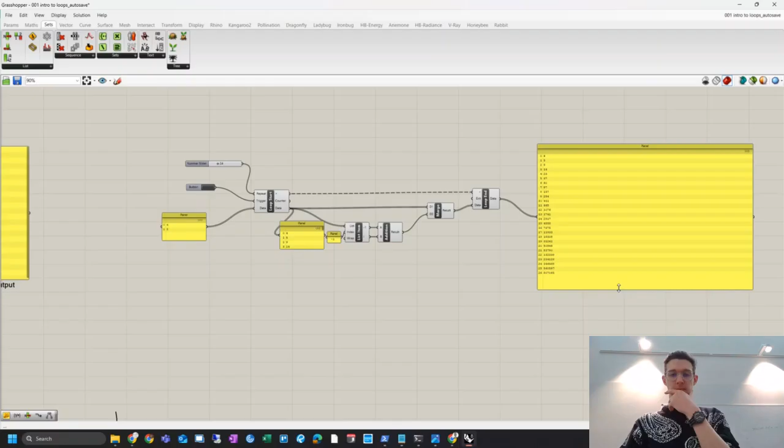That's all right, no, we're starting again. We've been really helpful, just for me to understand, because you're all part of one of there's another module that you're working in groups on. Just be really helpful to know which groups are being represented here, because then as we come to your own personal brief, I could think, okay, well in week 4, week 6, week 8, maybe we could do this instead. So we just start from wherever. Let me know who you are and what group you're part of and what your brief is at the moment. Anyone want to go first? Otherwise we'll just start at the end and move on. But yeah, go for it.

Part of? Gothic timber, yeah, got it. I can't promise, but if you say your name I'll try and remember it. Kine. Sorry, I can't hear for some reason, it's all these wonderfully designed acoustic baffles. Kai, brilliant, Gothic timber, Kai, excellent. Are you enjoying yourself? Yeah. Good, Gothic timber is pretty cool, right? Yeah, bending stuff, making stuff out of wood. Yeah, cool.

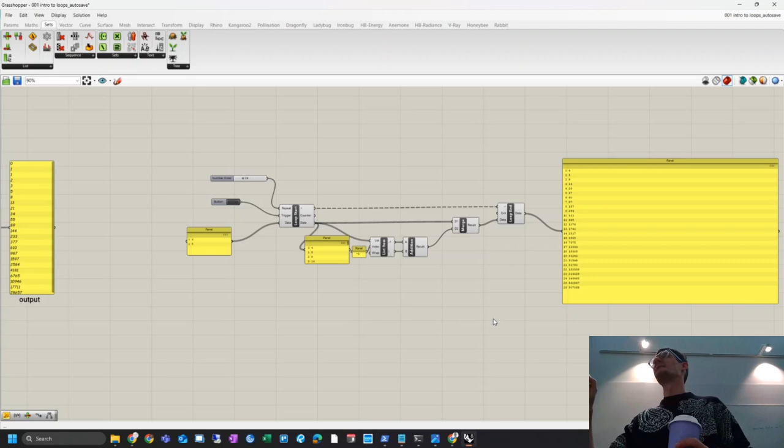I'm gonna have to try and get this right. Sampiotta, I'm really sorry, this is very embarrassing isn't it. I will do my best. Yeah, okay cool. Yes, yeah cool, I think I remember seeing most of your presentations so I'm trying to put everything together in my mind. Oh really, oh okay, you switched, I didn't realize you were allowed to do that. It was their special dispensation. Okay, all right, yeah cool.

Oh, the cob, the monster. Cob monster, yeah cool. My name is Fatma. I was in the urban mining group, but now I'm in the cob group. Oh, there's a lot of, is this like musical chairs? There's a lot of moving around. Thanks Fatima. Yeah, I'm Sim, I'm also in the cob group. Oh okay, oh this is the little cob corner. Yeah, cob community.

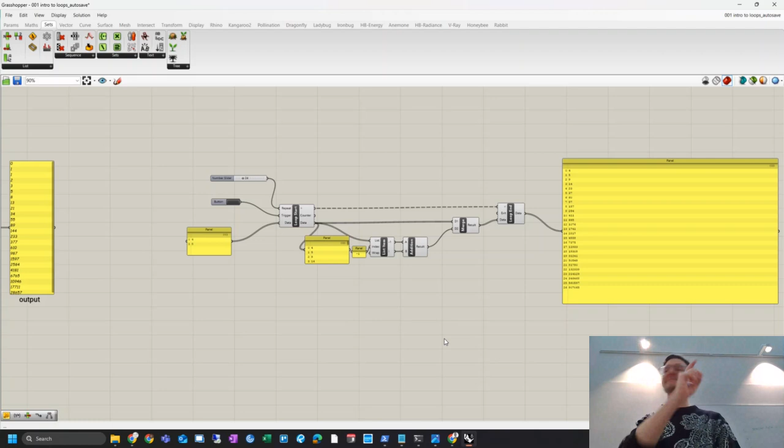Yeah, should we go over to you? I'm Ping and I'm in digital timber. Digital, the Gothic timber, yeah. With Kai. Yeah, with Kai. Kai and Ping, yeah, excellent. I'm Chan from Urban Mining Group. Urban mining, same with the stone? No, not stone. Oh are you doing, was this the group with the ceiling tiles, the roof tiles? Yeah, okay got you. My name is Agman, I'm in the stone group. Cool, Agman, Ayman, okay yeah cool.

I'm second year in GS2, I'm now in DCM. Oh that's cool, that's good, we're all here to learn. You and me both. Well, everyone knows you. Yeah, I'm Ali, I'm also an ex-DCA student. Cool, I'm second year now, and here to assist you. Yeah, oh so far none of this would happen without you, so well done. I'm Andrea. Andrea? And I'm with the stone. Yeah, with that. Sam, great.

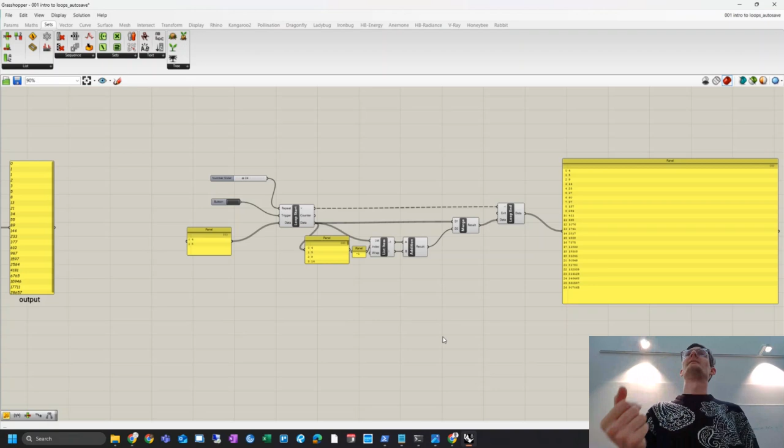I'm Shida, I'm in urban mining. Cool. I'm Hunter, I'm also from the urban mining group. And the urban mining group is the stone one, and the retrofit one is the roof tiles, is that right, or are they the same? Well, it's the same for this semester, but for the previous semester it was kind of different, the stone group was working on... Okay, oh well this is fun.

And what I'm glad about is that there's lots of different groups represented, so hopefully there's something you'll learn here that you'll take back to any group that you're in. Okay great. I can't promise to remember your names, but I'll try my best.

What I want to do is very quickly look at... by the way, save your work.

The thing that everyone talks about with Fibonacci is that people say things like, oh, Fibonacci is in nature. And you kind of go, yeah okay great. But I don't walk out into the world and see these numbers like 1, 1, 2, 3, 5, 8, 13. I don't just see these numbers floating around. So what do people mean when they say that Fibonacci is in nature? Usually what you'll see are these kinds of images where you've got a spiral, and you might well be thinking, okay, I see that there's a spiral and I see that there's this series of numbers, but how do they have any relation to one another? So this is yet another one of these really good examples where a computer just talks in numbers, but we want to talk about geometry and shape and curves and 3D, right? And those numbers aren't very useful to us until we've done something with them.

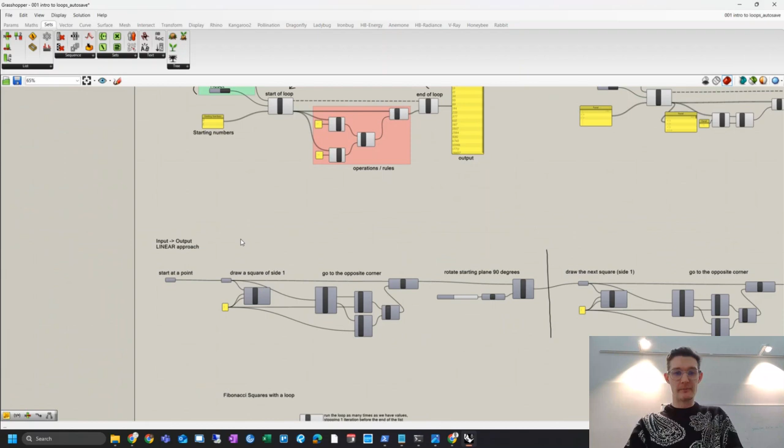But would it have been simple if I wasn't explaining it? Good question. But the way we're going to do this is exactly the same as we did here. We started with a linear approach. We didn't get into the loop until we understood what we were trying to do, and then we built the function that would do it.

So what we're going to do is start at a point. I might draw this on the board again. We're going to start at a point, and I'm going to draw a square of side 1. So we go 1, 1, 1, 1. So there's a square, and it starts at this point.

Then what we're going to do is go to the opposite corner of the square, which in this case is here, and draw another square. But if I just draw the square in the same way as I drew it before, it's going to go like this, right? Not particularly helpful.

What I want to do, to make a mess on the board, is rotate the plane in which I'm going to draw that square by 90 degrees. So instead of drawing a square off and up and to the right, it's almost like I take my piece of paper and rotate it 90 degrees and draw the same square—instead of going up and to the right, it goes up and to the left.

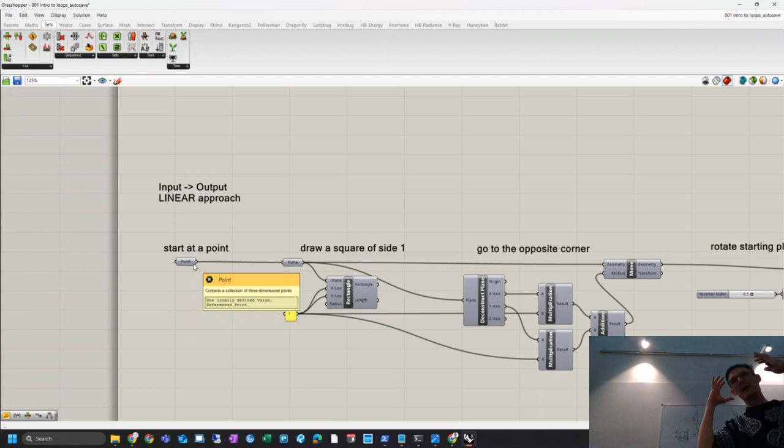Everything I've just talked about kind of makes sense in your mind when you're holding a pen and using a piece of paper. Try drawing a little sketch of it, use squared paper if you've got any, do a little doodle, and just try to figure out exactly what the processes are. It makes sense when you're holding a piece of paper and a pen, but a computer doesn't have a pen and a piece of paper—a computer just has numbers. So now we have to figure out what we're telling the computer to do.

And the first step of that is that we're going to make it happen in Grasshopper in a linear way. So we're just going to do 1 or 2 iterations, and then we're going to make that loop happen. Do you want to take 30 seconds and see if you can understand what the process is that I'm doing?

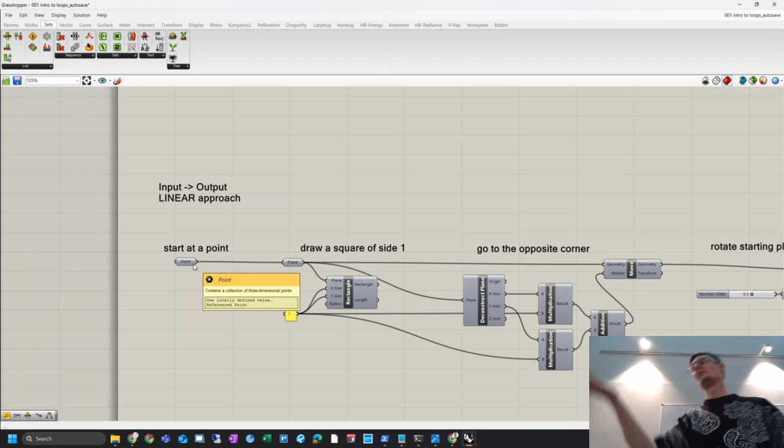The only thing that confuses me is when you say like side 2, for example, what like... Oh, a square of side 2 just means a square which has a length of 2 and 2. And a square of side 5 would have 5 along there and 5 along there. Every single one of them is a square, so it makes it much easier because it's not a rectangle where one side is different to the other.

Are you sort of getting what we're trying to achieve here? There's a cool little... this is your hand. And so if you measure the distances between your knuckles, what you'll notice is that this little guy here and this little guy here are kind of the same length. And that guy there is kind of roughly twice those two lengths, those two lengths added together. And then this distance here is that plus that. Roughly. I mean, nature is a little bit wibbly sometimes.

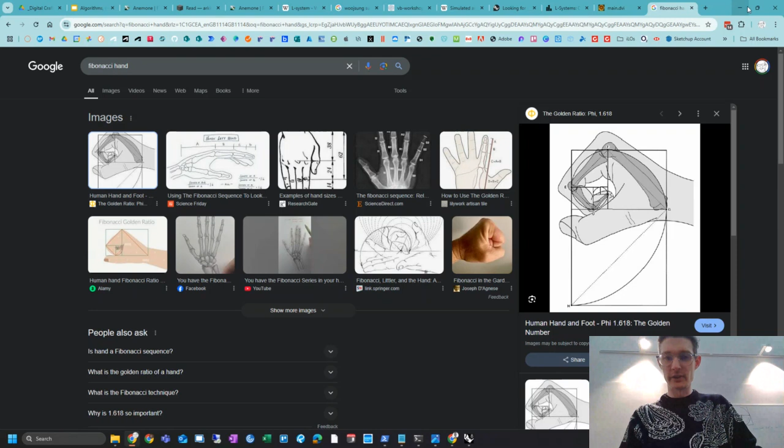Cool. We don't need to spend huge amounts of time, but do you kind of get what we're trying to do here? Yeah, you can kind of visualize it now. Pen and paper, always the first thing I reach for. So what we're going to do is we are going to go into my sort of split screen approach here. And we'll start at this point over here. In fact, I'll go into my top view. I'm going to start at this point.

And the cool thing about Grasshopper is that you can turn a point into a plane. Have you tried to do this? Have you ever done this before? You literally wire a point into a plane, and then that plane will then be the XY plane, like the ground plane, but centered around that point.

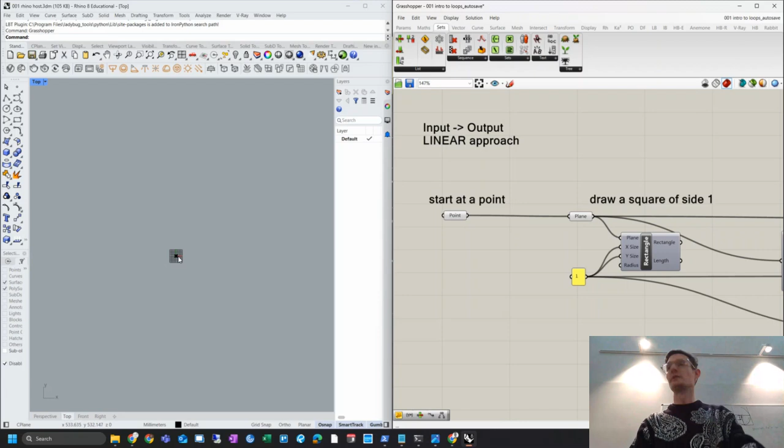Can we also choose to put the XY plane instead of just plane? Or does that matter? If you put the XY plane, it'll be centered at 0. But what I'm doing is I want to start at a particular point on my Rhino. But I mean, it doesn't make any difference. You can do it any way you like, as long as we start with a plane.

And the reason we're going to start with a plane is because let's look at this plane here. It's got a green arrow and a red arrow. It's got an X direction and a Y direction. And when we create a rectangle in a plane, let's just look at this guy. We create a rectangle in that plane. It's going to be going in that direction and this direction, the X and the Y direction of the plane.

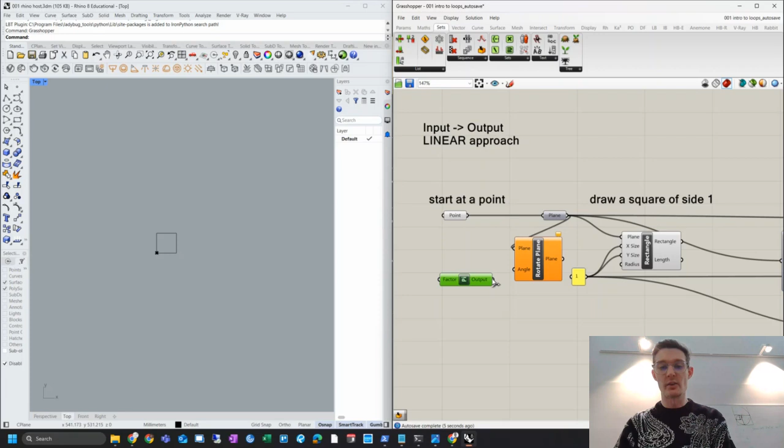Now, if I take this plane, let's just play with this for a second, and I'm going to type rotate. Actually, I can do rotate plane. Yeah, here we go. Rotate plane. I'm going to feed this plane in here, and it's going to ask for an angle, and the angle is in radians, so I need to wire in a pi, and I need to wire in a number for the factor of pi. And this plane here, as I change the rotation, I can rotate this plane around. You see? See what we're doing?

Nice and simple. But if I feed that plane into a rectangle and rotate the plane, I'm just rotating the rectangle around that point. Cool. I don't need to do that. I'm starting with a plane that's just as it is. And then the next step in the sequence of rules that I've just defined here is once I've drawn that rectangle in a plane, I'm going to go to the opposite corner.

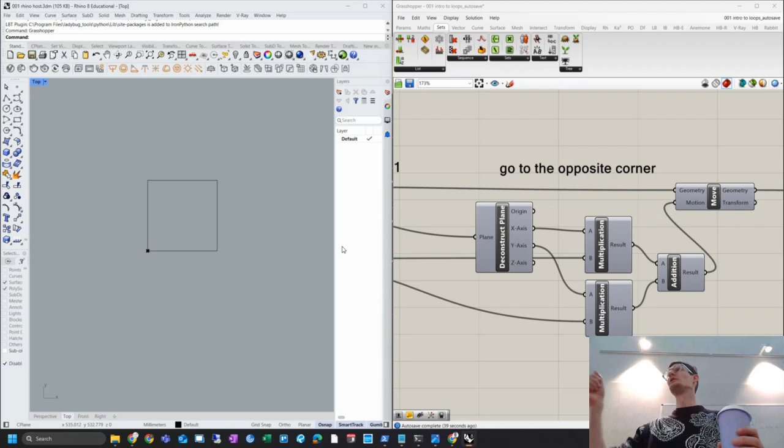But then if I take this point here and I move 1 unit along the x direction of the plane and 1 unit up the y direction of the plane, then I've reached the opposite corner of my rectangle, right? So I've taken this plane and I've deconstructed it. And a deconstruction of the plane gives me the origin, the x-axis vector, and the y-axis vector.

I'm going to feed those vectors into 2 things here. The first is a multiplication, because that vector is just a direction, and it's a unit vector. It's 1 unit in that direction. If I rotate the plane, it's still going to be that length. That vector isn't going to be the length that I want it to be.

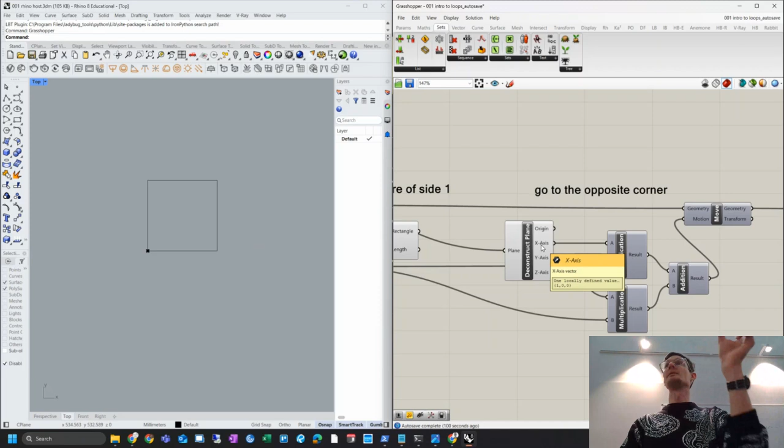So what I have to do is I multiply the vector by the size of the square that I want. So imagine this is a 5-size square. It goes 5 units across and 5 units up. I need to take my x-axis, which is currently 1, 0, 0 in the x direction. I need to multiply it by 5 to get to this corner.

And then I need to go up, and I need to multiply that by 5 to get to the top corner. So I'm going to multiply it by this guy here, the size of the square that I'm drawing. And then I'm going to do the same thing to the y-axis. I'm going to add those 2 vectors together. So we're effectively going 1 along here, 1 along there. The resulting vector is the addition of those 2 vectors, which takes me from this corner to this corner.

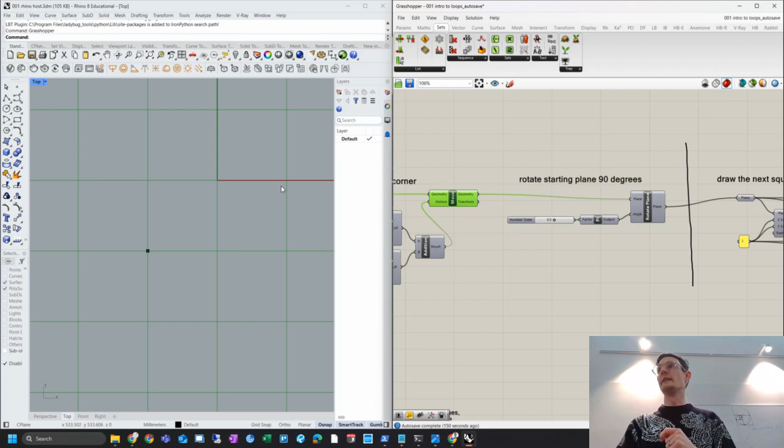And now if I turn that on, it's moved the plane from here to here. So we're moving a plane in a particular 2 sets of vector directions. Then I'm going to rotate that plane. Remember, by the way, green is up, red is across. Now I'm going to rotate that plane 90 degrees, and now green is that way and red is up. So I've rotated the plane 90 degrees.

Once I've rotated the plane 90 degrees, well, we draw the next square. And the next square happens to have a Fibonacci side of 1, still 1, because 1, 1, then 2, then 3. And we do exactly the same thing again. And I've drawn this little line in here that kind of separates it out.

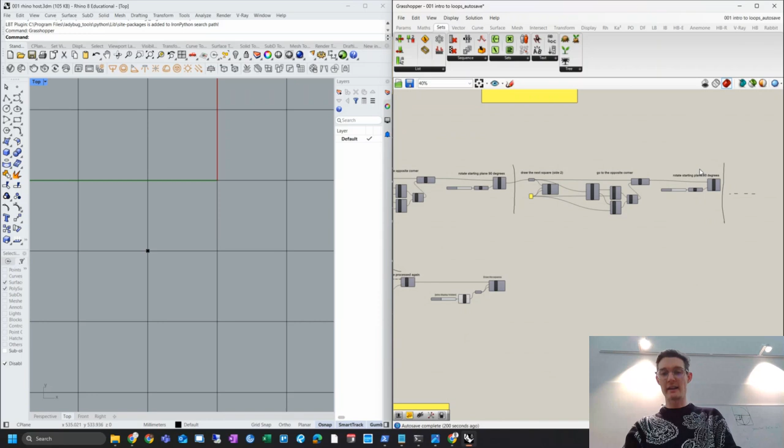Are you following along with me? Are you creating this definition as you go? Cool. Then we draw the next square. And then we go the opposite corner, and then we rotate the plane. And we could keep doing that for a long time, but it's going to get really, really boring.

So what I'm going to do is, now that we're happy with that approach, the linear approach, we're just doing 2 or 3 iterations. Now let's think about how we're going to loop this. So the first thing we're going to do is we're going to bring in the values from the previous loop output. And I'll make this on the right-hand side so you can follow along, and we'll do it together, okay?

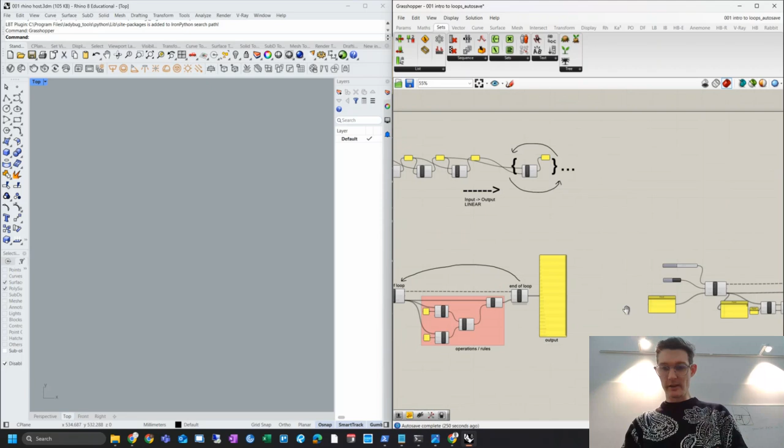So the first thing I need is this guy here. These are all my Fibonacci numbers. They look wrong. They're wrong because I started 1, 1. There we go. Started 0, 1. And there we go. They should be the same. Yes, they are. Great. So I've got my Fibonacci numbers here that I've created using a loop. I'm going to take the output of that. I'm going to use that in our next loop.

And the way we're going to do that is I'm going to come over here and I'm going to start with a panel. And I'm going to connect this panel to the output that we got from the previous loop. And then, because I don't like these lines being all over my definition, I'm going to right click and do wire display hidden.

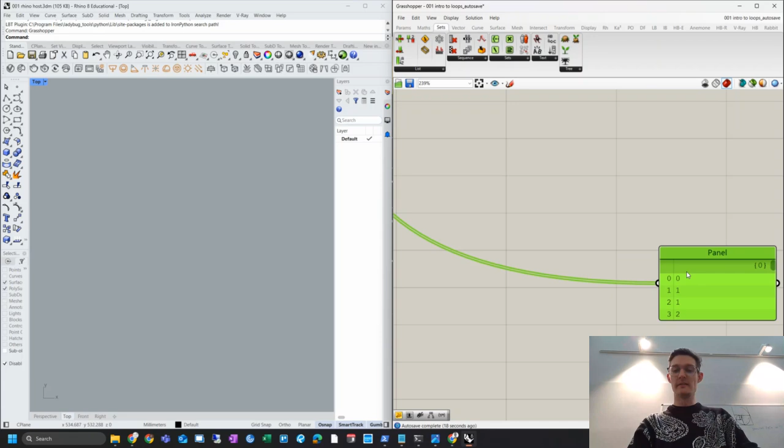And it turns it into like a little Wi-Fi signal. And if I click on the element, it will bring the line back so I can see what it's connected to, but it doesn't disrupt my definition. So now what I've got is my list of Fibonacci numbers. Here we are. And what's the next thing we're going to do?

Well, we're going to start at a point, and we need a starting place for our loop. So here we are. I'm going to set one point, and I'm going to select it in Rhino, or you can start at the origin, completely up to you. If you want to start at the origin, you can. We start at a point, and then I'm going to send that to a plane. There it is. There's my plane. I'm going to turn the display of that plane off just because it's a bit annoying.

And then we need a loop start. I'm going to send that plane data in, feeding in a plane. And we need to know, well, how many times are we going to repeat it? I don't know, let's do 12. And we need a little button to reset the loop. There we go. And then we need a loop end to connect up. And this isn't receiving any data yet. We haven't passed any data in.

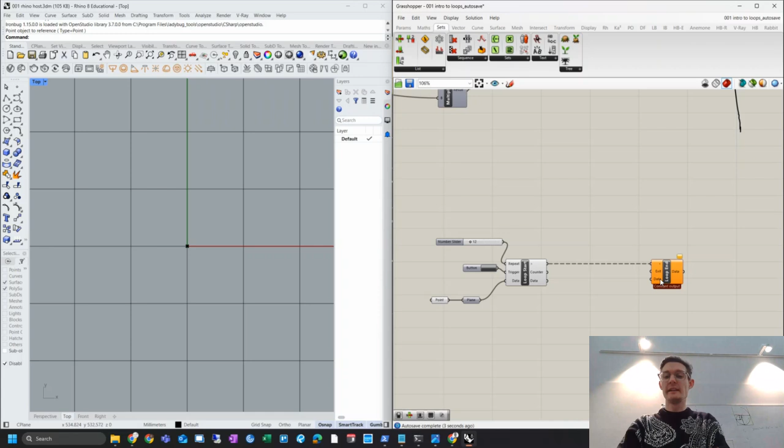And then what are we going to do? Well, one of the things that we did before was we had a list of all of these numbers and we added to that list every single time. There is a nice way that Anemone gives you the ability to record the data as you go around the list. So it means you don't have to maintain that list yourself. It's going to do it for you.

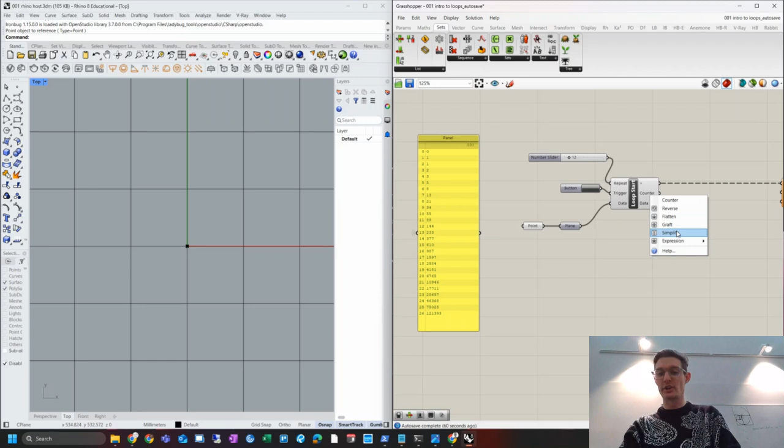And what we're going to do is we're going to start using the counter information, exactly like you asked. Well, here's the thing, right? You've got a list of all the Fibonacci numbers here, and they've got indices, and there are 25 there. So the first time round this loop, I want to read the first number, which in this case is actually 0. But let's ignore the 0, and we'll put an expression on that counter, and we'll say x plus 1. And now that's going to read the first index, not the 0th index. So that's going to start us off with a number 1.

That counter is going to allow us to make a list item node that takes the index and then this list. And now look, the item should be saying 1 because that's the item that's at index 1. Now, that number on this iteration of the loop is telling me how big my rectangle should be. And I have a plane to draw it in.

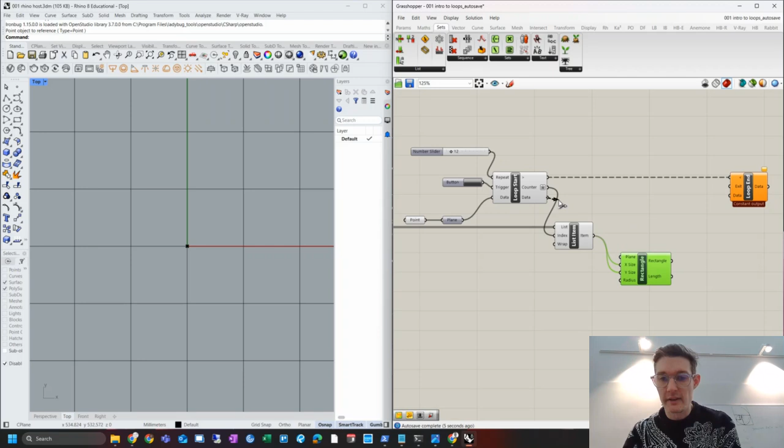So all I need to do is type rectangle, and the x size and the y size is going to be given to us. And the plane is the plane. So as I click on that, this has gone green. It's drawn me a rectangle that's of size 1 in the right plane.

Now, actually, I'm not going to draw the rectangle just yet. What I'm going to do is use the loop to do all of the plane rotation and movement functions. And then I'm going to let Anemone do something really helpful, which is the end of the loop. If you right click on it and zoom in, it says constant output. That means that it's outputting the last thing in the loop. It's going to loop 12 times and then give you the last thing.

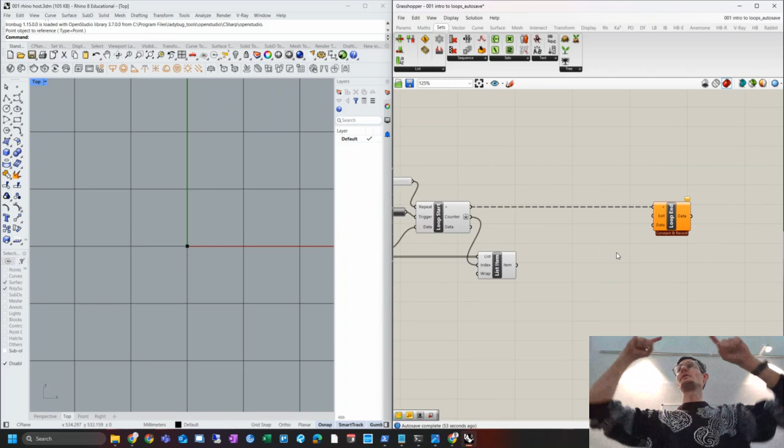But if you right click on it and do record data, now it says constant and record. Well, constant and record, what that's going to do is if it loops 12 times, every single one of these outputs is going to be stored in a list. And then it's going to give me the list of all the things that it's produced.

So what I'm going to do is feed in a plane, and I'm going to do a series of loops which move the plane, rotate it, feed it back in. Move it, rotate it, feed it back in. Move it, rotate it, feed it back in. And then I'm going to end up with a list of planes that are in the right places and in the right rotations. And then I can use that list of planes to create a list of rectangles that go in exactly the right place, of the right size. Yeah, cool. So here we go.

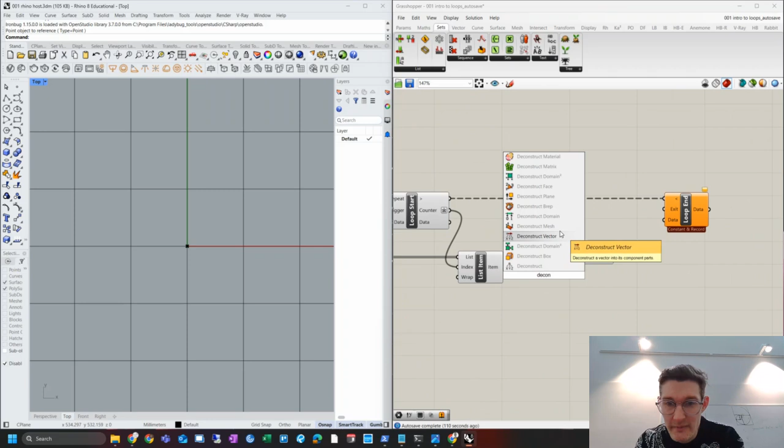I take my list item, which is in this case 1, and I'm going to move the plane. I do it exactly the same way as I did before. We're going to deconstruct it, deconstruct plane. We're going to move it 1 in the x-axis direction and 1 in the y-axis direction. So I need a couple of multiplications here. 1, 2, x-axis, y-axis, times 1, times 1.

Then I need to add those vectors together to make one single movement vector. And then I'm going to take my plane that's come in and I've moved it here. So I've used a motion and a move tool here. Are you following along so far? Making some sense? However, I'm not quite done yet.

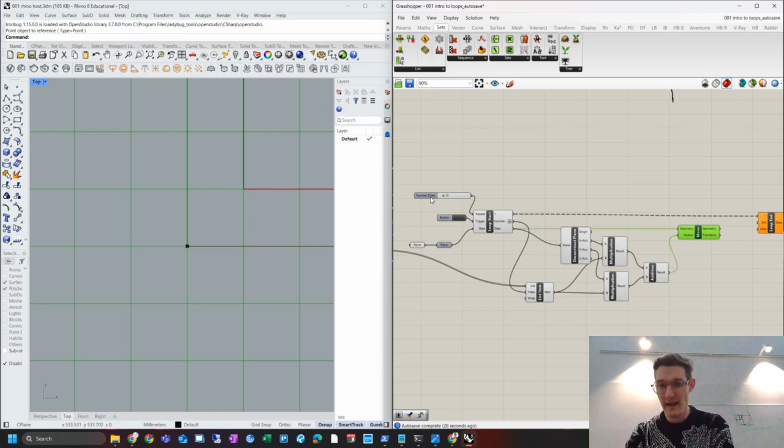I've got a plane. I've moved it to the opposite corner. In fact, look, the green and the red lines have moved to the opposite corner of the square. So I'm on to a winner. But then the next thing I need to do is rotate that plane 90 degrees to the left. So now what I need to do is rotate plane.

And if I was a little bit lazy, look, I've already got a definition for rotating a starting plane. And all it is is a number slider 0.5 times pi feeding into a rotate plane with a plane input and an angle input. So what I can do is just copy this from my linear definition.

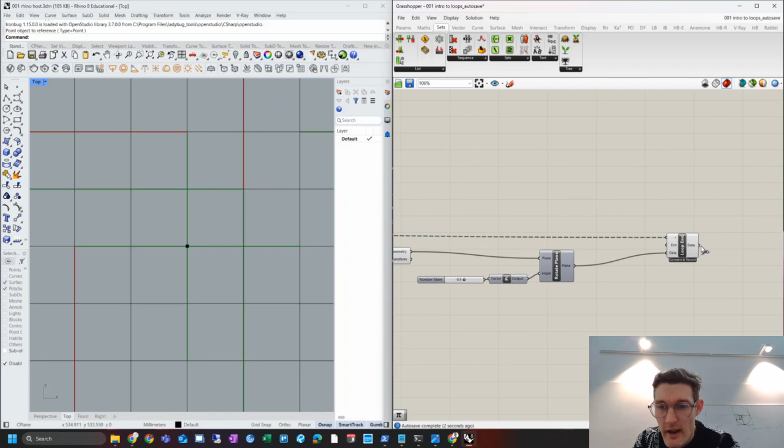Here we go. I'll get rid of that. And instead of being attached to this, I'm going to attach it here. So then this rotates the plane. And then, now I'm done, I feed that back into the data. And then I want to have a look at what I've ended up with.

What I've ended up with should be 12 planes. There you go. You can see there's one here, there's one here, there's one here, here, here, here, here. And they're already starting to look a little bit like if you just join them all up, they'd be like a spiral.

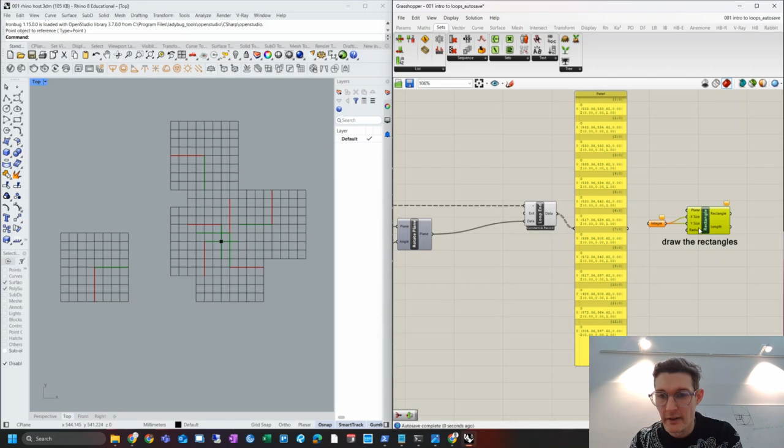Now those planes are all very well and good, but now I want to draw the rectangles in place. So I'm going to put a little scribble to remind me what I'm doing here, which is draw the rectangles. And now what I want to do is I want to make one of these, and I need an integer value for each one of the rectangles, and I'm going to feed in the planes.

However, you'll notice that these planes are part of a tree. The line is dashed. So the data structure of this is being added to by the loop component. All I need is just a simple list. So all I need to do is flatten that down. And now I've got my list of planes, just a flat list. I'm going to feed that in here.

And what I need, ideally, is the first 12 integers to match up with the first 12 planes that I've created using the loop. And that will draw those rectangles in the right place. So all I need to do is bring this list over here, all the way across, and feed that into my integer value here.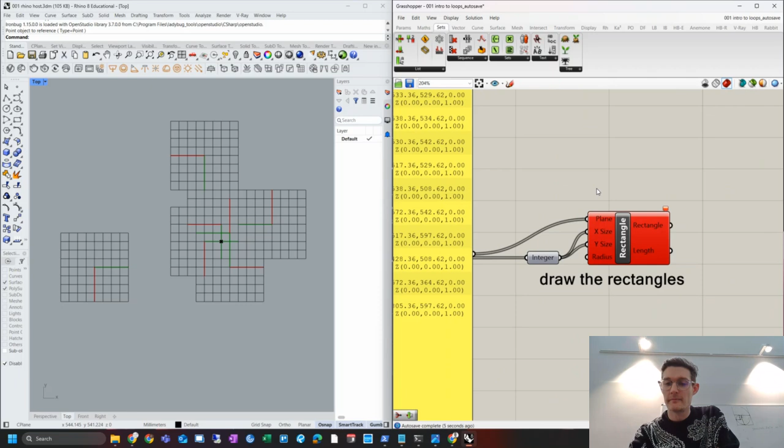Why do you flatten the data? Oh, flatten the data. Okay. So imagine you're the loop component and you're thinking, right, okay, so I've gone around once and I've got some bit of data that the user has done something with. Then I've gone around again and I've got some other bit of data. Then I've gone around again and I've got some other bit of data. It doesn't know what you want to do with that data. So what it does is it puts them all in different branches of a tree, and then it allows you to filter through that tree and do what you want with it.

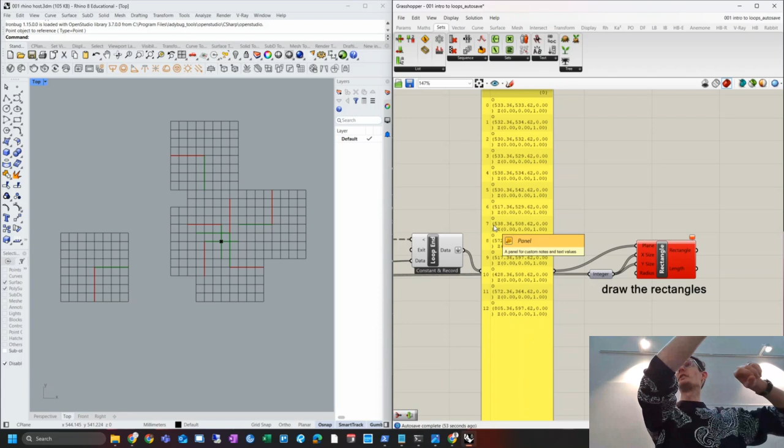So effectively what you're doing is you're saying, this is the data from iteration 1. This is the data from iteration 2. This is the data from iteration 3. And they're all branches of a tree. But if all you want is just the result of iteration 1, 2, 3, 4, 5 in a list, all you do is you take that tree and you flatten it into a list. And that's all I want at this point.

Now, oh yeah, there we go. Because I fed it through a panel, it turned it into text, which wasn't very helpful. So I've connected that up now. And here are my rectangles. And almost certainly something's gone wrong. Ah, yes. It's a whole load of mess. So now we have to figure out, well, why is it going wrong?

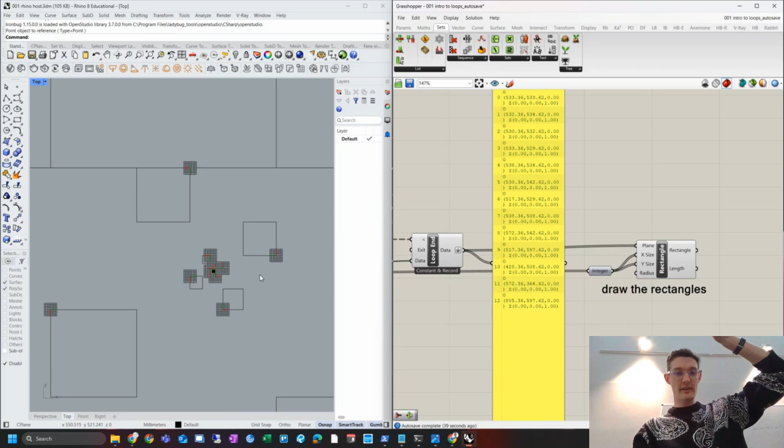Well, a couple of things, right? The first rectangle that I assumed would be the case would be one that started with 1. But I'm feeding in a list of integers that starts at 0. So it's all offset. So it's drawing these squares, but they're the wrong sizes. And they're on the wrong planes. So all I need to do is I need to take this list and I'm going to shift that list. Here we go. I'm going to shift it, not 1 along. Oh yeah, there we go. That should work.

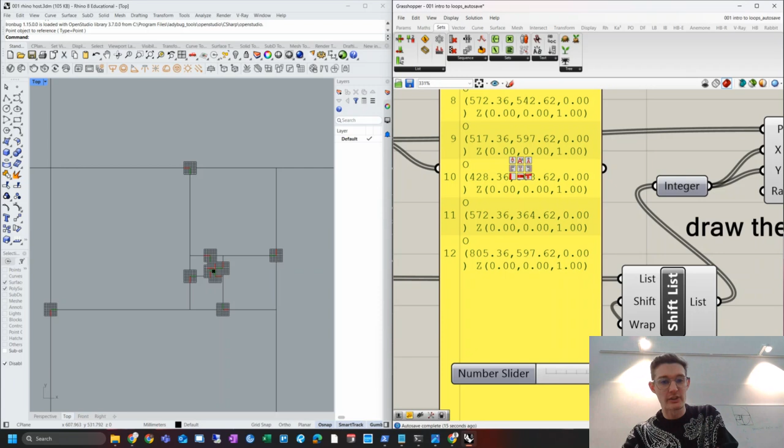I'm just going to give myself a little number slider to figure out exactly where we need to shift it. There we go. If we shift it 2 along, the reason for that is that the first iteration doesn't actually get counted in the list. So all I've done here is I've shifted it until it just suddenly flips into place. And I'm going to turn off this. And here we go. So here's our starting point. 2 squares of side 1, side 2, side 3, side 5, 8. And we can keep going.

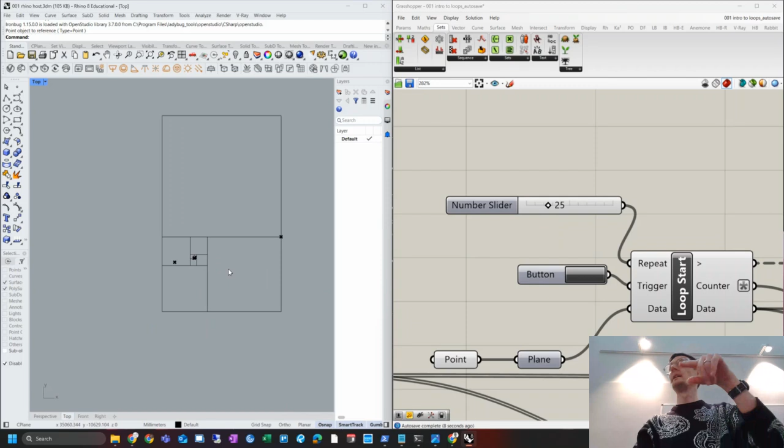And now these squares here, do you remember my list had 26 of them? But I only generated 12 planes. So it doesn't know what to do with the rest of the 14. So all I need to do is as I drag this up to the same kind of number, it's going to keep adding the planes in place and the rectangles will find a home because the 2 data lists are going to match up. There we go. And you can kind of see it drawing in this cool way. So now there's 25 of these spirals and you can zoom all the way in and all the way out.

And you see how self-similar it is. Like as you zoom out, it kind of looks the same as it did when it was zoomed in. All just from a simple sequence of add the last 2 numbers together. And now you can get this geometry that's very complex. How long would that take you to do by hand? Well, for 25, probably about the same amount of time. But for 100, very different.

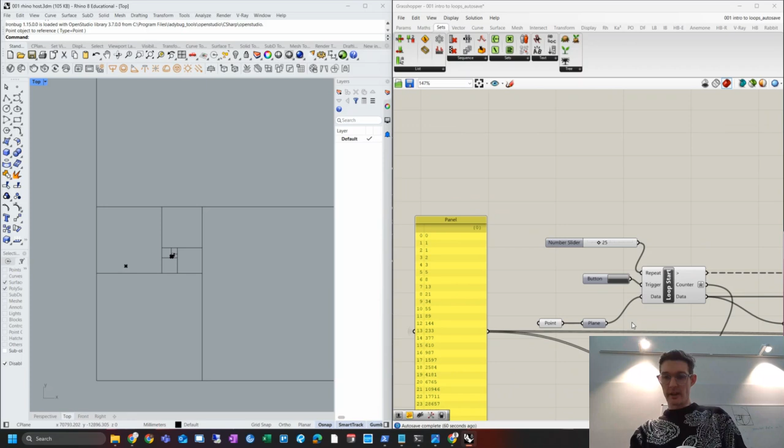So, in the iteration, you multiplied 0.5 by, what you multiplied with that? Say that again. We've multiplied the... This one? Yes. This is a rotation of 90 degrees. But Grasshopper doesn't like 90 degrees. Grasshopper wants radians. Do you remember in GCSE maths, this is a circle? Yeah? A full circle is 2 pi radians. So half a circle is pi radians, and a quarter of a circle, which is what we want, 90 degrees, is pi divided by 2, 0.5 times pi.

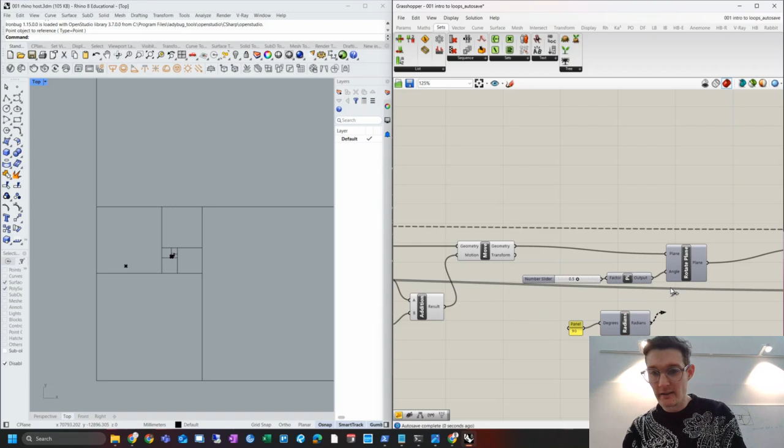But if we were to put the angles in degrees and we offer 90 degrees, would that work? Yeah, well, if you hover over this guy here, it will say rotation counterclockwise around plane z-axis in radians. So what you can do is you can type radians, and this will give you an ability to put in degrees and put out radians. So if you found it easier, you could do this, and it would give you exactly the same result. It's just that I think of this as how many pis.

Yeah, makes sense? Would you be able to repeat just the last part regarding the rectangle? Where did you get the list from? Yeah. So actually, this is a really, really good question, right? Because this is kind of what we're trying to do with the whole approach. We've done a loop and we've generated a whole load of numbers. Then we've taken that list of numbers and we've fed it into the next loop. And then the output from that loop, we've done something with that.

So the steps are: add the numbers together to generate the list of the Fibonacci sequence. Then generate the list of planes from that list of numbers. Then once you've got the planes, add the rectangles to it. So you're asking exactly the right question. How do I know where the numbers have all come from? Right. This is a panel, which is the output of my Fibonacci sequence. All I've done is just connected those panels together.

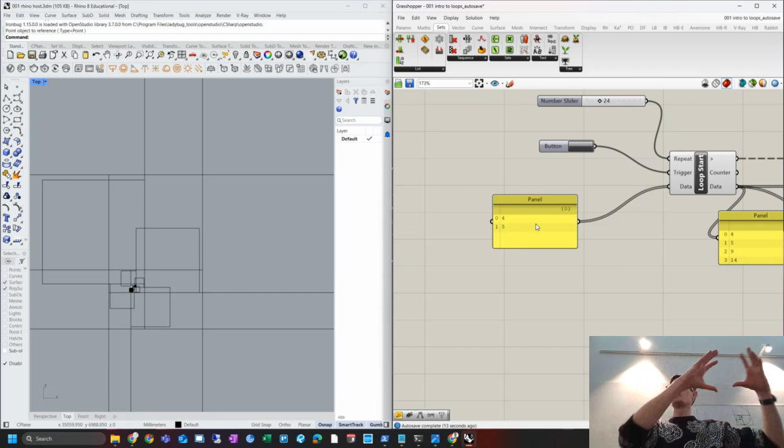And what that means is, if I change my starting numbers here, I can see a different Fibonacci spiral. Let's try it. I don't know whether it's going to work. Yep, there you go. It's completely broken. But, you know, it's a nice starting point, right? You can now start to play with the whole process, because now I could reimagine what my Fibonacci sequence looks like, and that's going to affect all of my rectangles that get drawn. Yeah?

I just asked that because the rectangular output, I think I did it wrong. Maybe I missed a step. Are your rectangles like all over the place? There's no rectangle. Oh, there's no rectangles. So do you see what's going on here? As I shift that list, basically the rectangles are too small for the planes that are going in. So I need to shift it twice up to get rid of that first 0 and 1. I'll get rid of this panel because it's a bit confusing.

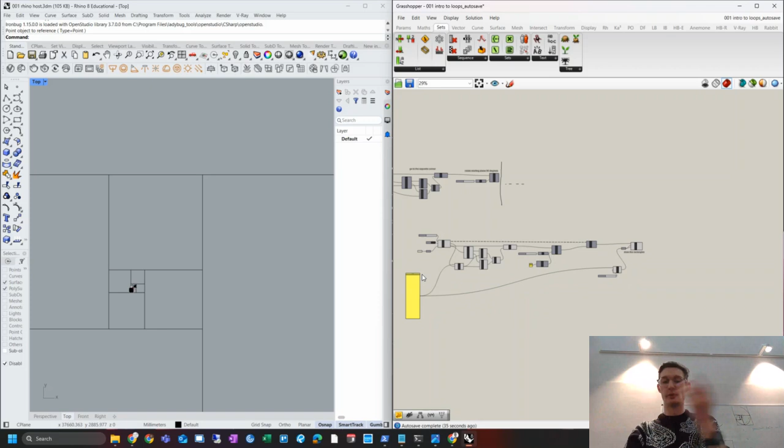This is probably easier to see. This list of Fibonacci numbers, I'm just using those to drive the size of the rectangles. That's all I'm doing. So this is my list of Fibonacci numbers. I send that list, I shift it twice to get rid of the 0, which we don't want, and the first one, which the loop just ignores. And then I send that list of integers to drive the sizes of the rectangles, but I also feed it a list of planes.

The plane is the end of the loop, right? The plane is the end of the loop. Yeah. And because I happen to have 26 perfect planes that are positioned and rotated correctly, and 26 perfect sizes of rectangles, the rectangle just goes, oh, I've got 26 planes, I've got 26 numbers, I know what to do with this. Yeah.

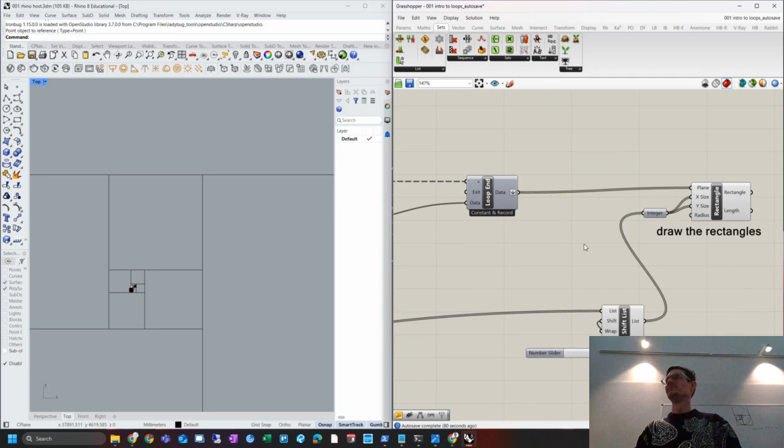I have a very small question. In the beginning, we got the values from the previous loop, but we also add a number slider, and it's now 24, right? So at the very beginning... yes, here I have something different, I guess.

What you can now do is tie this together with a list length node. Instead of a number slider, I just want to use however many of these I have. Then I can get rid of the slider completely, I don't have to manually type that in. I just say, whatever I've generated, that's how many times I need to go through this loop.

And then you'll see it's working rather nicely. Sorry for all the questions. No, questions are good, this is good, checking my script. Do you have a question? Same problem. Okay, let's go and have a look, see if we can see the same problem.

So I got the planes, they're rotated, but I don't know why the rectangles are not. If you hover over that, you'll get an error that says data conversion failed from text to plane. It's because you've typed that - that was exactly the same mistake that I made.

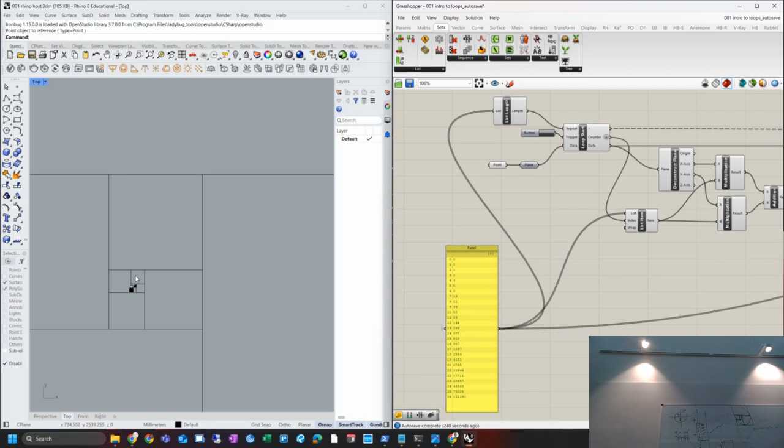I'm really keen that we start to move on and not just play around with these kind of little things. Let's just make sure we save our work.

Now, I've been weighing up whether there's another thing I want to show you that is very similar to Fibonacci. I think with this one, I'm going to show it to you, and then you've got the grasshopper definition, so go away and try to recreate what I've just shown you. I don't think it adds a huge amount, but there is a really cool little thing that I want to bring to life a little bit. So actually, I'm going to demo this rather than you work through it at the same time.

And it is something called L systems. Ever heard of L systems before? Anyone come across L systems? No? L systems are really cool, and they have some oddly interesting relationships with the Fibonacci sequence, which we just looked at, which is that the way they work is they model growth - they model biological growth.

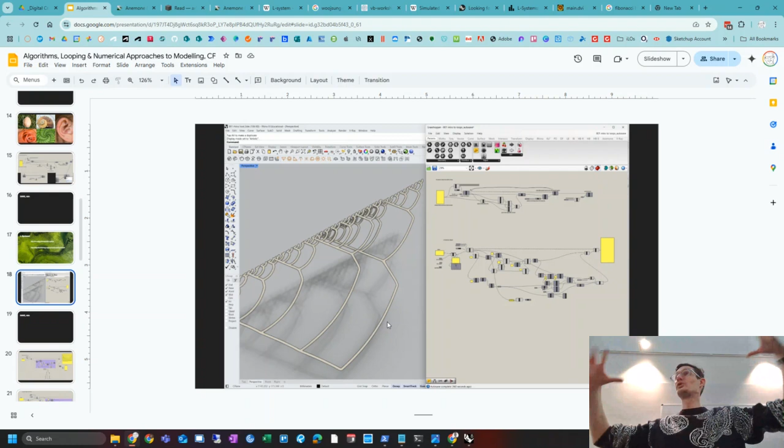So if you have a Google for an L systems image, what we're going to do is produce this kind of thing. You start at a starting point, and then there's this kind of branching that happens. But every time that branching happens, you end up with two more ends of a branch, and then that can branch as well, and then you've got two more ends of a branch, and then that can branch as well. And that's how trees form branches - you start with one trunk, and then it splits into multiple branches, and then multiple branches off that, and then at the very end you've got little tiny twigs and leaves and all sorts.

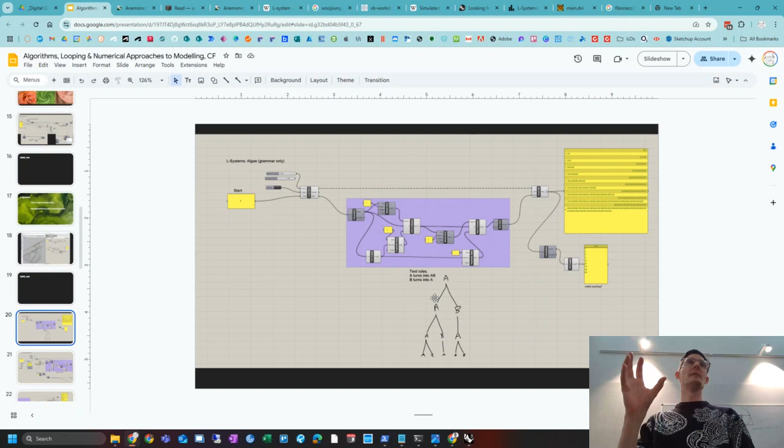And the way L systems work is that it's trying to do a mathematical model of how that branching happens. Because when you look at a tree, you don't think, oh, there's maths - you just think, well, there's a tree. But the way it works is quite interesting, actually. What we're going to do is turn our attention from numbers to letters. L systems is what's called a grammar, and a grammar is a technical term, but basically what it means is... I'm going to turn this guy off so you can't see it. There we go.

We're going to start with a letter A. I can draw this on the board - maybe this is a good thing to do. It's a string, just a series of letters, that's all it is. And I'm going to give you two rules.

These rules are rules, and this is the start. Do you remember that slide I put on? You have a starting input, you have a set of rules, and then you end up with a sequence. It generates a sequence. This is my starting point, and these are my two rules. I will apply those rules whenever I can to my string, and every time I apply those rules, that's one iteration.

Now, you might think to yourself, this doesn't feel very much like trees. This feels a bit like English or maths or something. Well, every time there's an A, we can turn it into an AB, and every time there's a B, we can turn it into an A. But we can only apply these rules once per iteration.

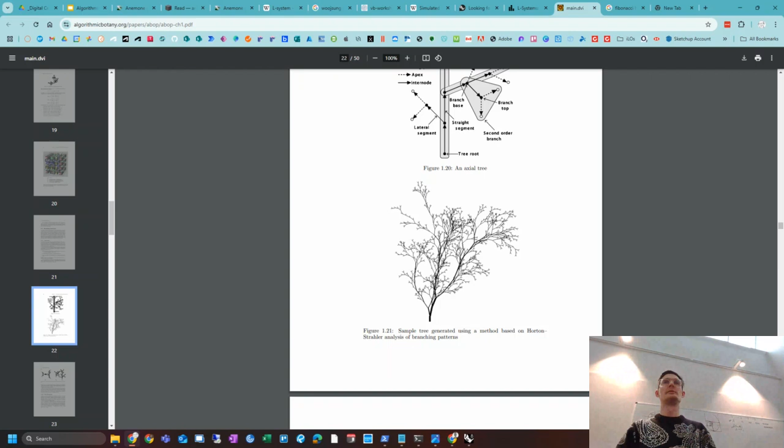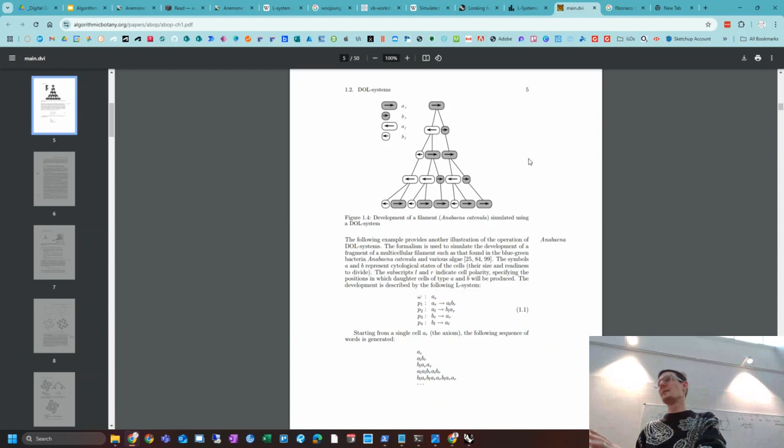If you're not sure about how to turn an algorithm into something a computer can understand, usually someone's done it for you before, and they've written a paper about it, and you can read it and understand it. So I didn't come up with this. I'm not that much of a genius. Someone else has written the paper, and they've spent their PhD or their life's work working out how these letters are going to turn into this thing. All I do is go, okay, great, thanks for doing that work. I'll credit you in my acknowledgements, I'll add your paper to my bibliography, but I'm going to use it to generate something.

So let's look at this. I've got starting point A. I've got a loop start, I'm running it 8 times. Loop end. And the text rules are A turns into AB and B turns into A.

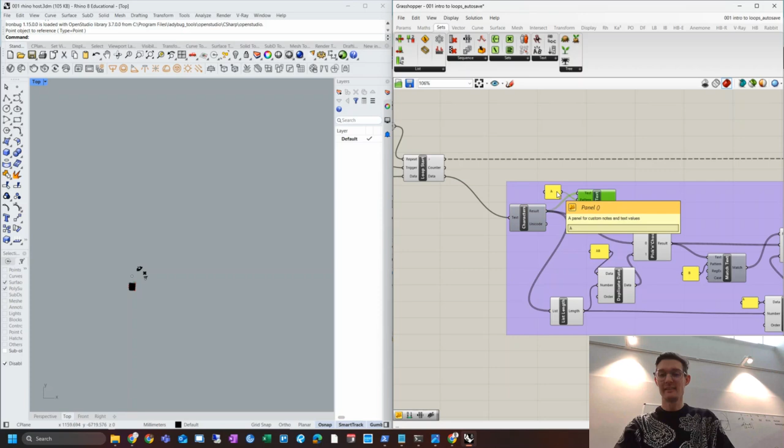So what I do is I take my text that comes in, I split it into a number of characters, and I say if the character matches A, then replace it with AB, and if the character matches B, then replace it with A. And then I send that result back out and I loop round again.

It's kind of very similar to the Fibonacci sequence, and you'll see there, then I can generate these with incredible complexity. In fact, if I keep going, that's 19 of those, and that's what I end up with. That's only 19 iterations, and it's that long already.

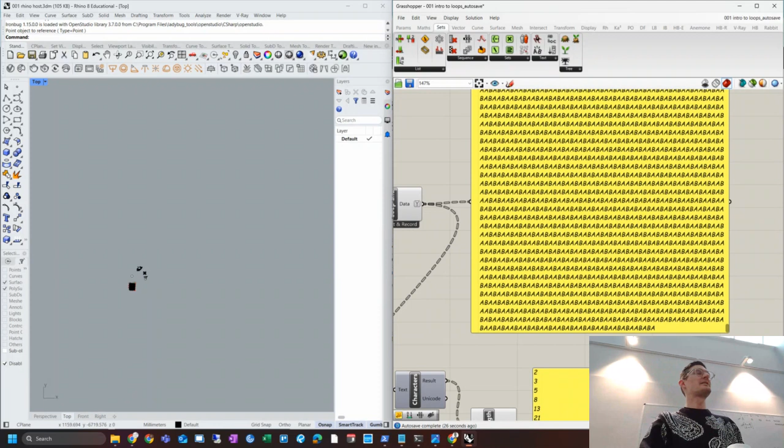So you remember when I said that computers can generate huge amounts of complexity that takes them billions of years to solve very, very easily? This is kind of a good example. All I did was just nudge a slider, and now I've got a string that's like hundreds and hundreds of characters long. And there's my terrible drawing of exactly what's going on here.

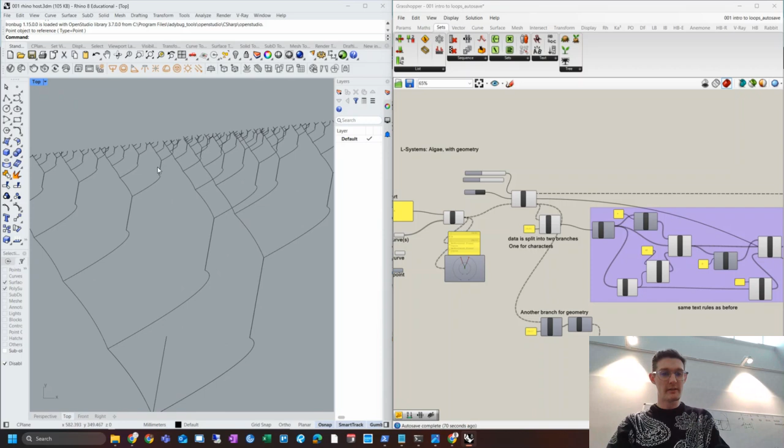And then I can add some geometry to that. I've got myself an A curve, which is here. I've got myself a B curve, which is here. And every time I have an A in my list, I'm basically sending this in. Every time I have an A, I branch out. Every time I have a B, I go straight. And I end up with this guy here, which is starting to look a little bit like some kind of tree or something.

Now, this is a little bit more complex and probably something for you to have a play with in your spare time this week. But the thing to not lose your mind over is this guy here. I've highlighted this in purple. This is the text generation stuff. And all I've done is copied it over, and it's exactly the same. So this looks complicated, but all I've done is just taken what I've done before that I know works and copied it in.

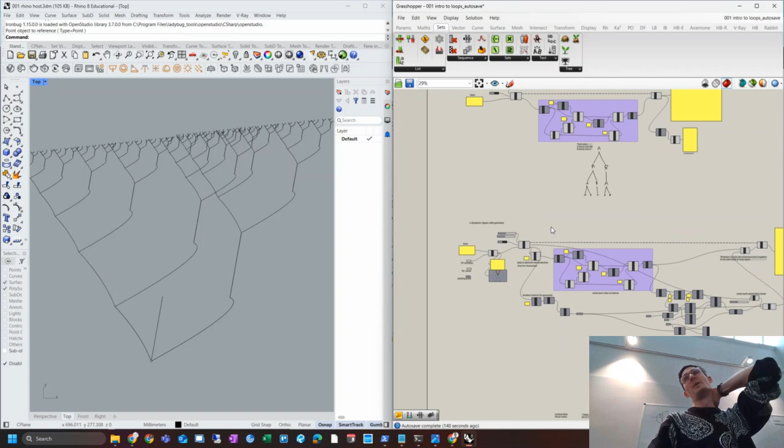That's pretty much what I want to show you from the L systems point of view. But especially if you're thinking about projects involving growth, L systems are something to look into. And there's also a plugin called Rabbit, which allows you to play with L systems in a more interesting way. You're typing different grammars into this system and it will generate the geometry for you.

We don't really have time to go into this in great detail, but all that's happening is everything I've just described - this is putting that into computer language about branching a branch, and then I got 2 ends, and then I can move that branch and scale it to the ends of the existing lines. And then what I end up with is a whole series of lines.

Yeah, I think we're doing okay for time. What I want to do is have 5 minutes for questions, and then I'm going to introduce you to something called surface flow. And then this afternoon, we'll have a loop with a fitness function and an evolutionary algorithm to solve it. It's going to get very cool.

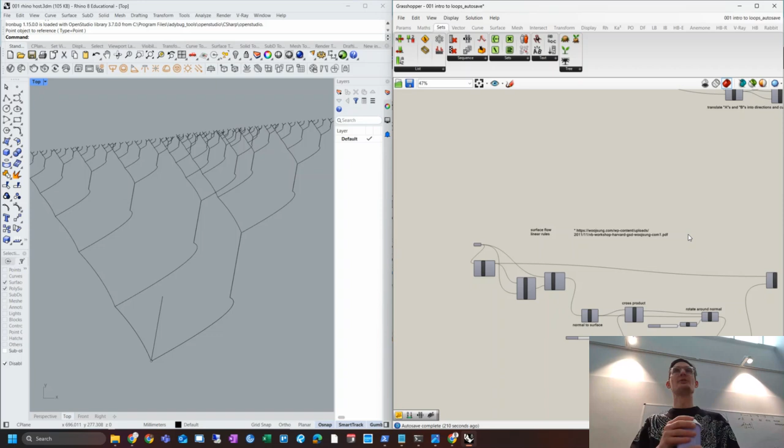Are there any questions whilst we go? Because I'm aware we're getting very mathsy, getting very technical. Is this kind of stuff that you have done before, enjoy doing, or are we like, kill me now? It's something new, but it's just interesting.

Yeah. Which one are you looking at? Well, the Fibonacci one. Yeah. Okay, let's have a look. So the plane coming in. Find this item.

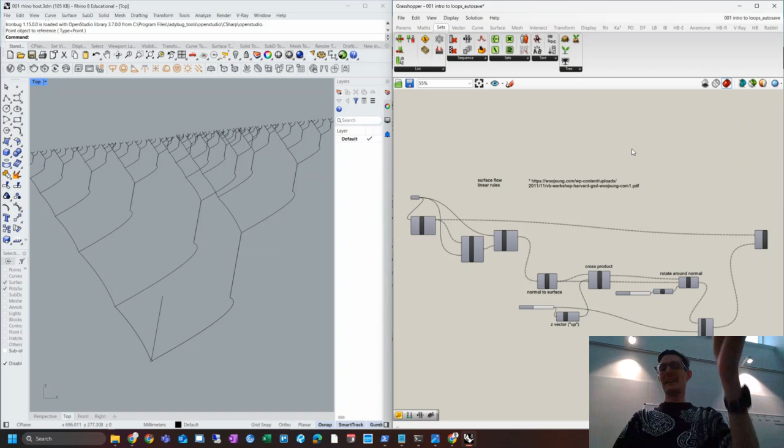Any other questions before we move on? Any other questions on this before we move on? We're going to look at something that I think is a little bit easier to visualize now, but will involve a little bit more maths. So you can have it one of two ways. Okay. Here we go. Oh, is this going to load? Yeah, here we go. Right.

So we're going to look at this, which looks rather pretty, right? And what actually we're going to do is we're going to stay within this particular algorithm for the rest of the afternoon. And we're going to think about how we can push some of the control over this. Now, you may not be interested in this particular algorithm, but the approaches are going to be really helpful for everything that we're going to look at.

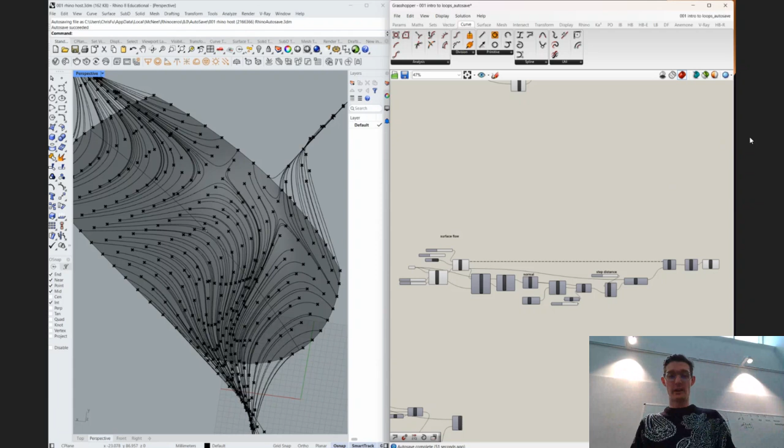And what this is asking is the question, if I have a particular surface and a raindrop falls on that surface, which way will that raindrop travel? Yeah? Does that kind of make sense? So if you just picture in your mind an umbrella, and the rain is falling on the umbrella, and then the raindrop kind of moves down the side of the umbrella and then off the edge. Woo, like a little lemming. Now, an umbrella is a fairly simple shape. You kind of know it's going to go down.

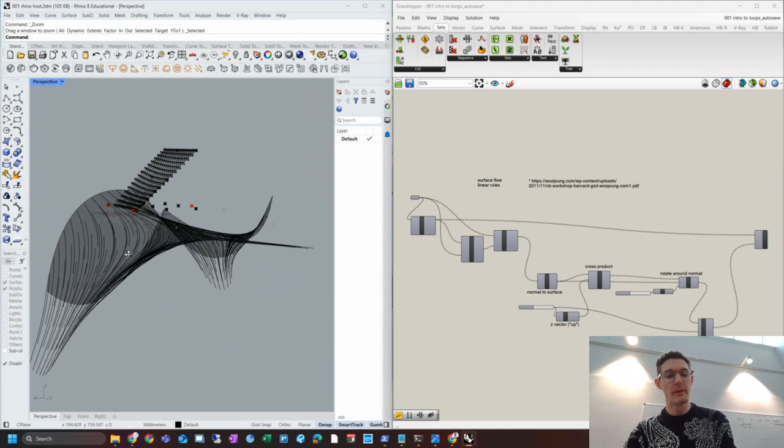But what if we had a much more complex shape, like, for example, a double curved shape. As I spin this around in 3D, you can kind of see what's going on here, right? The raindrop falls on this shape, and then it falls down. But obviously as it's falling, it goes into this little valley bit, or it joins up with all of its friends and runs off in little rivulets.

And exactly where does it end up? Well, that's quite difficult to work out mathematically. And it's quite difficult for you to picture, for any shape, where is this raindrop going to go? Well, you'd probably have to just drop a raindrop on and watch it and just guess, right? But luckily, we have the ability to do some cool things here. So actually what I'm going to do is I'm going to turn this off.

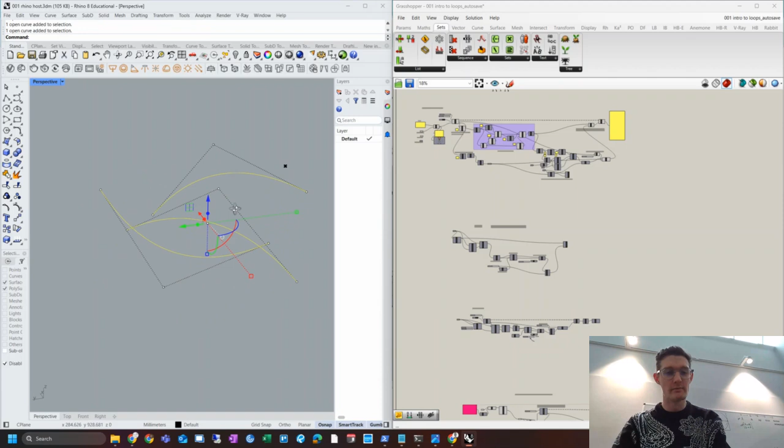What we have going on is I've just placed three-point curves on the Rhino world. So if you're on Rhino 8, all you need to do is just grab a NURBS curve, 3 points, and then make 3 of them and drag the points up and down in some way. So you end up with 3 curves where maybe 2 of them go down and 1 of them goes up, 2 frowny faces, 1 smiley face, something like that. But as you play with it, you'll be able to see what's going on here. And then I'm going to loft between those curves. Very simple Rhino move, just loft between the curves.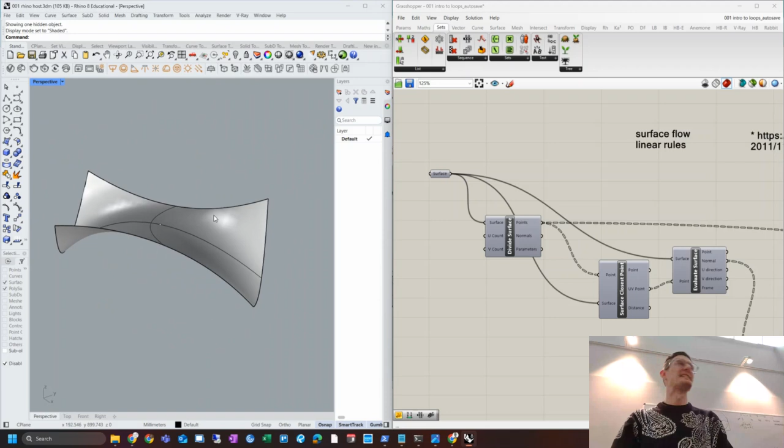If I type show, you'll be able to see that there is one here. I'll go to shaded view. So here's my lofted surface. And yours will probably look different. I sort of hope that it does. You can play with yours a little bit. And it's this double curved surface. And then all that's happening here is I've brought that surface into Grasshopper. And then we're going to do some really interesting things.

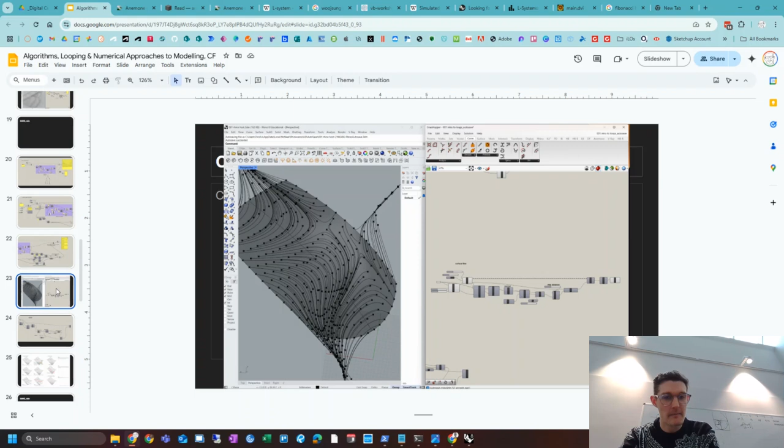This looks like a very simple loop. There's actually fewer elements in this loop than there were in the previous one. And that's kind of good because what it's actually doing is very complex, but we're able to optimize it for something that the computer can work out very, very quickly. And the first place I'm going to look is, do you remember me mentioning diagrams? There's a website in here, and the easiest way of finding it is just to Google Woojsung surface flow.

And you'll see a link to a PDF called Rhino Grasshopper Visual Basic Workshop. We're not going to work in Visual Basic, but the process is exactly the same. Hopefully this kind of image is recognizable to you. It's kind of like the same kind of lines that we're producing.

And if you scroll down and have a look at the second page, there's the thing that says idea. And it says the goal of the definition is to simulate the way water flows downwards on a hilly terrain. Let's start by dividing the process into 3 parts. Part 1, we're going to define a drain slope vector at an arbitrary point, called an input point in our definition, on a given surface, and then decide the possible position of an output point on that surface.

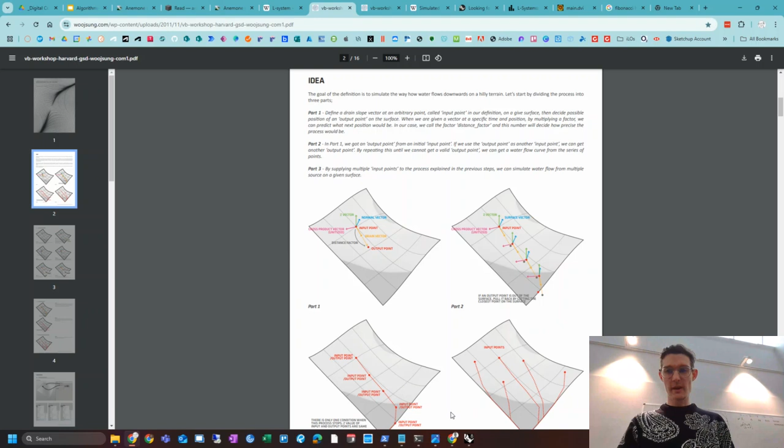When we're given a vector at a specific time and position, by multiplying a factor, we can predict what the next position would be. In our case, we call the factor distance factor, and this number will decide how precise the process is going to be. Everything I've just said there, I'm fully expecting you to be like, what? Because we're not mathematicians, but we're very visual people, us architects. And what we can do is look at diagrams. So let's take a look at this first diagram.

This is our surface. This kind of hilly surface goes up, goes down, goes round, goes about. It's got all sorts of shapes. And what we do is we pick a point on that surface. Maybe if I have this, no, I can't take this piece of paper off. I pick a point on that surface, and what we're going to do is try and figure out, if I was a raindrop at that point, which way would the surface make me want to go downhill?

Well, luckily there's some maths behind this. And again, someone else has done the maths. I don't have to do it. I just have to understand the maths and be able to translate it. And the first thing is, you take this green thing, which is a Z vector. This is a vector pointing straight up at that point on the surface. Then I need a normal vector, which is the blue one.

Everyone know what normal vector means? Perpendicular to, could be the XY plane, but it's usually on a surface, like a fluid surface. The normal vector is going to point in which way? 90 degrees. Yeah, you're kind of doing this. Yeah. Well, kind of up. But what if the surface was like this? 90 degrees to the point on the surface? Yeah, okay, great. So we're trying to be really specific because we're going to need to tell this dumb computer what to do.

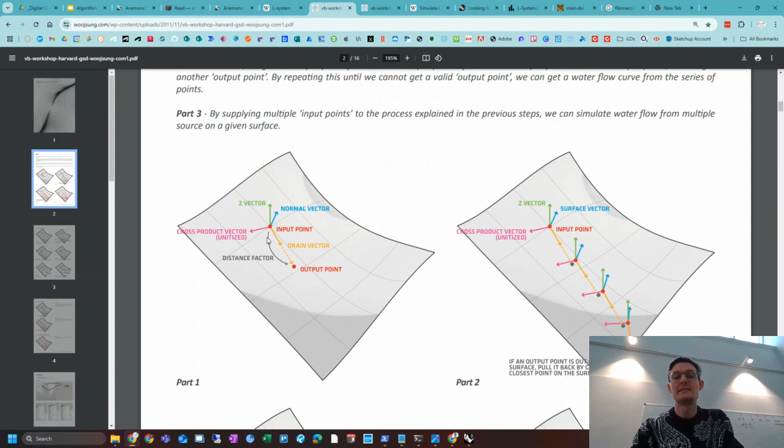It's like if you've got two choices, you can either walk around the contour line of the hill or you can walk straight down the hill. But those two are always at 90 degrees to one another. So all we need to do, take the cross product of these two vectors, rotate it 90 degrees, and then we're firing downhill. Then we do something cool, which is we move that point along that vector.

Now there's a problem, which is, here's my normal, here's my surface. I'm looking in section, I'm in 2D, right? And I move it, and here's the resulting vector. And I move down the hill. But we're on a curved surface. So I'm going to end up not on the surface anymore. I'm going to end up floating just a bit above the surface, or just a bit below the surface, because the curve doesn't let me go there in a straight line.

So the next stage is I need to take this point here, and I need to bring him down and put him on the surface again. And then I'm going to take a normal from that point. I'm going to do the same cross product, and I end up with this vector. And then he's not on the surface anymore, so I bring him down, and then I do the same thing again. And then I bring him down, I put him on the surface, and I do exactly the same thing again. Do you see maybe we're going to be using some loops?

Yeah? This whole process, that's one little step, and then I'm going to feed that through a loop, and I'm going to do it maybe 100 times, and I end up with a curve. Yeah? That's why loops are so powerful. There is no way of generating these kinds of curves in one go. You have to use an iterative approach. Now, like I said, you may not care about these curves. I think they're particularly beautiful, but you may not care about it. But this is one of those things that, like many, many other things, you have to use a loop to solve the problem.

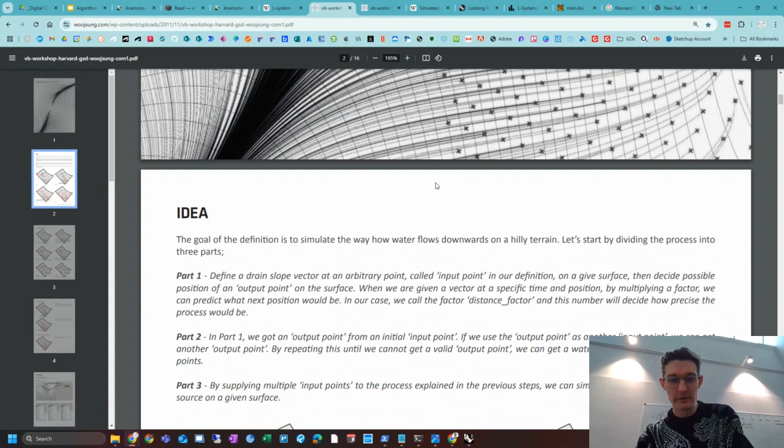We've got 5 minutes till 1 o'clock and we need to sort of pack up and go. So I think probably when we come back, we're going to look at 3 things in quick succession. The first is, well, I've kind of done it on pen and paper already. So we'll tick the pen and paper box. Or you can draw a little thing in your notebook over lunch if you want to really understand what we're going to do. Then we're going to make a linear approach.

So we're going to try Grasshopper without any loops. I'm going to just kind of, okay, what am I trying to do? How am I going to build this definition to do what I want to do? And then we're going to make a loop. And then we're going to feed the loop into an evolutionary algorithm that will allow us to control the output of that loop, which is going to be fun. We've got a couple of minutes for any questions, and then we'll break for lunch, I think.

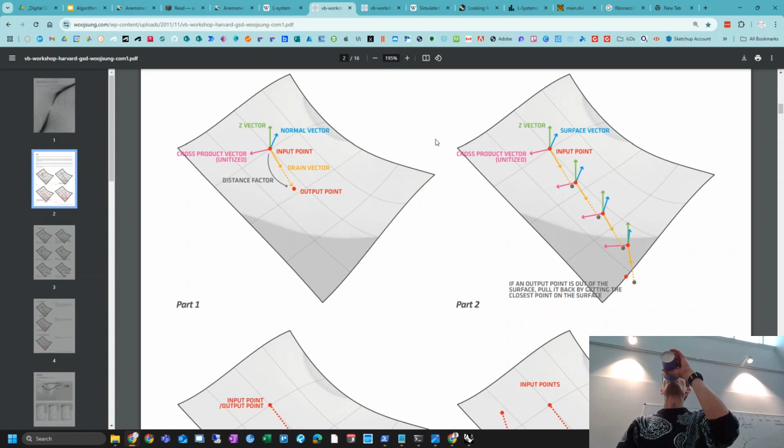Just think about what you were doing right there. So how would that transition into the idea of the raindrop? Or will we talk about it after the break? Yeah, so everything that I've just done here, mathematically, that's giving you downhill, down a slope. Okay. And raindrops, we know, go downhill, down slopes.

So what we're going to end up with is each of those steps is a little bit along the path that a raindrop will take when it goes down that surface. And when you then take all of those tiny little bits of lines and you draw them together, you get a curve on a curved surface, which is the path that raindrop's going to take.

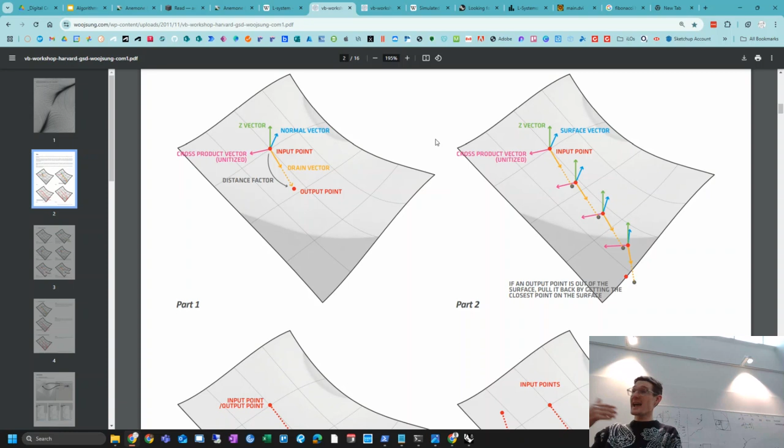And this is just the way my mind works, because I'm trying to go from a physical process that I can see happening in the real world. I'm going to try thinking, well, what is the numerical approach for making that work in a computer? And then I'm going to build an iterative way of solving that. Yeah. And it's a fairly complex problem, right? Like, given any surface, you can't just sit down and draw that route. You don't know it. So it's a complex problem to solve, but you can work it out with this process.

And we're very much standing on the shoulders of giants. Like, I haven't come up with this. This is a mathematician who knows what they're doing. And you go, okay, right, I need to find what's the vector process. And then I just need to translate that into Grasshopper. And you end up with, this is the route that the raindrop's going to take, basically. Oh, yeah, there you go. There's your right-hand rule.

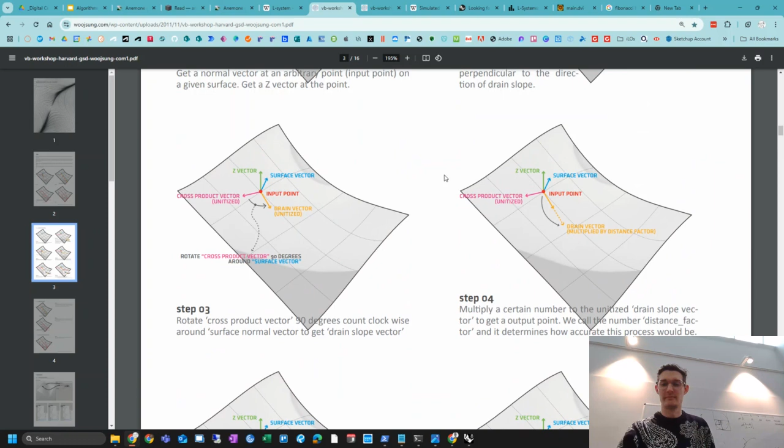Yeah. Actually, I took IGCSE. Oh, yeah? I was able to do computer science, and this is the first time that I've ever heard someone say Visual Basic, because I used it. Yeah. Visual Basic is super cool. And no one knows what Visual Basic was. Yeah. Oh my God, this feels weird.

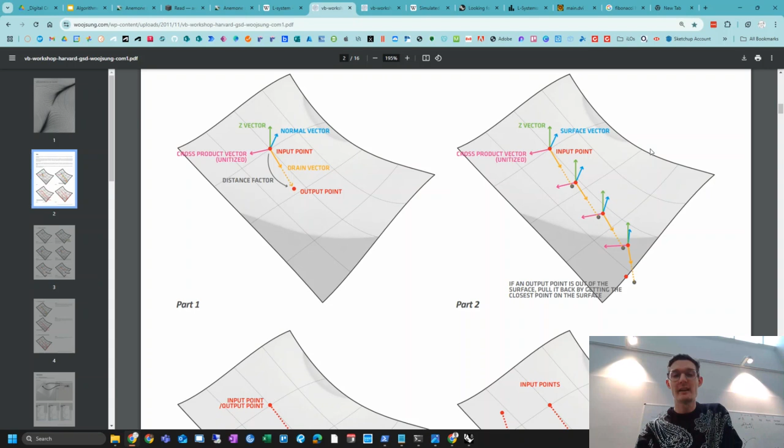By the way, just whilst this is on the screen, everything that I've just described, drawing on the board and all of this kind of stuff, when we say in the brief for this unit, diagrams to explain your process, this is what I mean. Yeah? This isn't just a screenshot of some Grasshopper nodes. Someone has actually spent the time drawing this diagram correctly and well, and it's a perfect example of this is how I'm doing this.

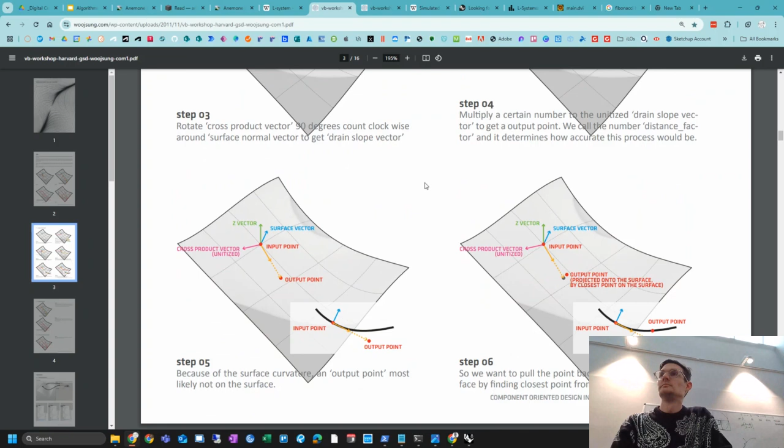And you're having conversations about the numerical approach rather than, I use this Grasshopper node. You're saying, I care about flow on a surface, so this is how I'm solving that problem. Would we be able to get the directions with the help of Grasshopper, but then, for example, take it into Illustrator and give it color? Yeah, absolutely. So you could take this from Grasshopper and take it into Illustrator. Make sure that everything's the right color.

You've got a key. Look, here's this little diagram that I drew on the board, where you've got a curved surface, and then you know that you're going to get outside of the surface, so then you need to match it back to that point on the surface and all those kinds of things. To be honest, the starting point for all of this is a sketch in your sketchbook where you plan out what the diagram is going to look like, and then you take it into Illustrator. And sometimes I'm not sure I'd even generate something from Rhino to take it into Illustrator. I just start drawing this in Illustrator from a sketch, because it doesn't have to be accurate. It's just diagramming your approach.

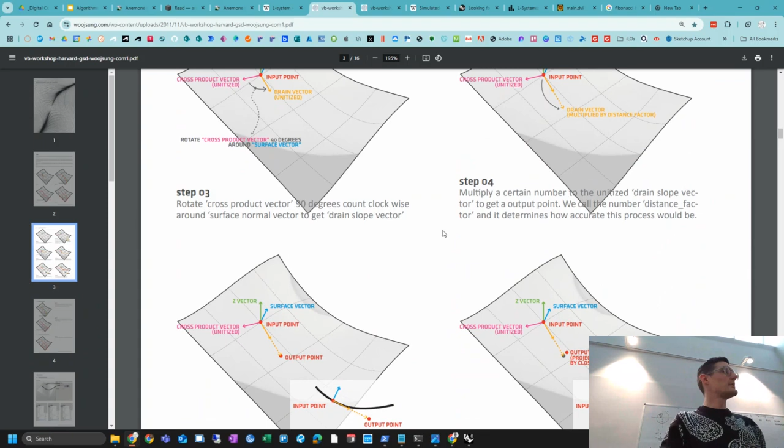I think over lunch, a really good question to start asking yourselves is, what is the problem I'm trying to solve in my design brief right now? Because this is a solution to surface flow along a double curved surface, which I'm interested in, but you might not be interested in. But if you can articulate the problem that you're trying to solve, the complex issue, then you might be able to find someone who's written a paper or published a PhD on that thing. And then you could translate it into a Grasshopper script that actually will do what you want it to do.

So trying to figure out what the question is you're asking is a really good thing to try and do, maybe over lunch. Chat with the other people in your design groups. Say, okay, well, what's the complex problem I'm trying to solve? And then see if you can write it down.

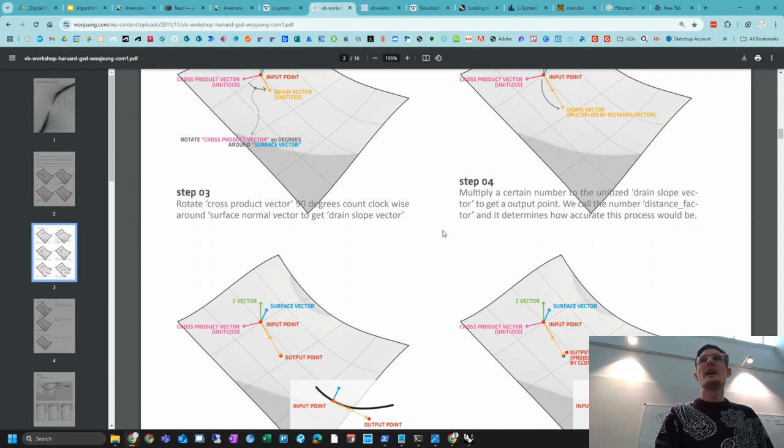Okay, it's 1:00. We're in Gibbs after lunch, so I have to leave this beautiful new building. Do you all know which room we're in? I think they have. Yes. We're in Gibbs, G110. G110. Okay, great. I'll see you there then. Brilliant. Have a good lunch. See you in a bit.